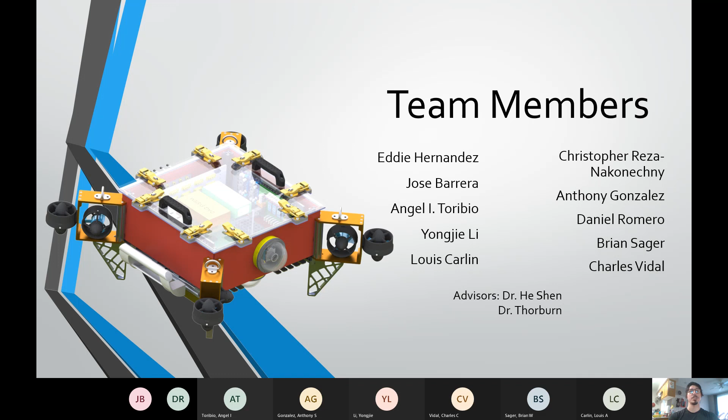I will start us off with the background. The RoboSub competition is held yearly by the nonprofit organization RoboNation and its affiliate sponsors. It is intended to foster the spirit of positive competition and community in STEM, specifically in robots, across a range of age groups and backgrounds. It tasks participants with building an autonomous underwater vehicle, or AUV, which navigates the underwater arena and completes tasks. The image on the right is an aerial view of the arena, the Naval Information Warfare Center Pacific, located in San Diego. During a normal competition year, the AUV will earn points by completing tasks.

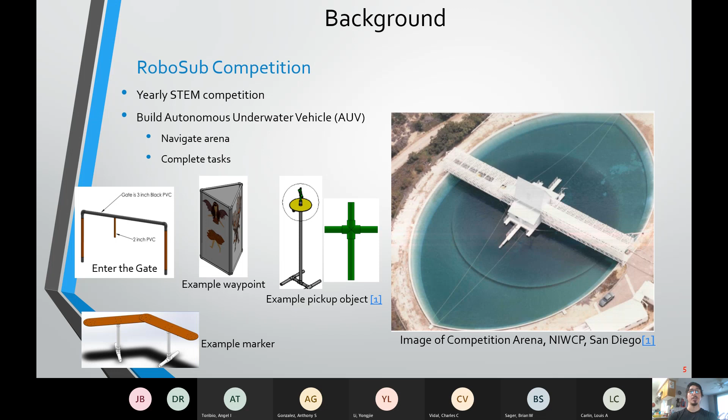The smaller images below show examples from last year's competition where the theme was vampires. This, however, is not a normal competition year. Due to the COVID-19 pandemic, the format of the competition has changed, which is why you're watching this pre-recorded presentation. But the AUVs will still be designed with the intent to complete the tasks as if there was a physical competition being held. Scoring will be judged not on AUV performance, but based on a presentation, a report, and a website.

Entering into the RoboSub competition this year is Lanturn. Our engineering senior design team has inherited this design from last year's members. Included in our inheritance is the SolidWorks 3D model, rendered images of which are pictured on the right. The top two images are the frame and the hull respectively. The bottom image is a rendering of the two components connected, including the internal components.

The project this year, considering the inherited model, consists of three main design steps. But before we even begin, our team first had the task of getting up to speed with what has been done. We distributed the files, analyzed the design intent of the hull, frame, actuated parts, and electrical components. Then we could take the first step and ask the question of each of these components: do they satisfy the requirements?

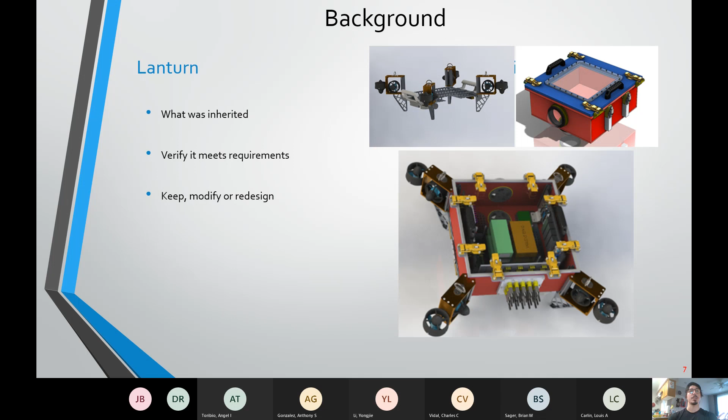The second design step depends on the answer to the previous question. If the contemporary design did seem to satisfy the requirements, then we move forward and verify the results of analysis that was done and complete any necessary analysis that was not. These could include stress analyses, heat transfer analysis, whatever analysis is required to provide confidence in the performance of the component prior to building and testing.

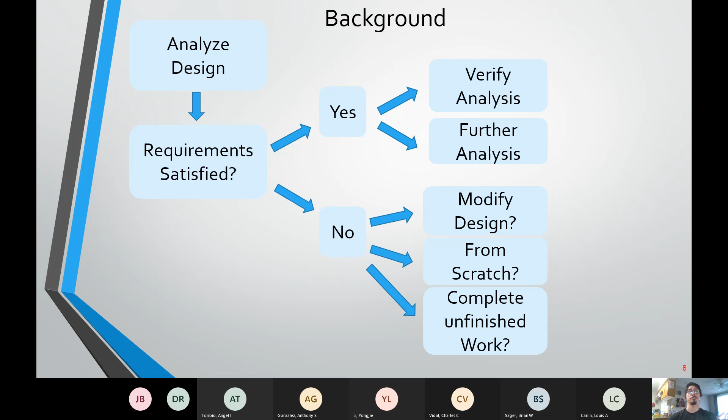If the contemporary design did not seem to satisfy the requirements, then we move forward and ask the questions: should we modify the design? Should we redesign from scratch? If the design was not finished, should we finish it? Taking into account the scope of the project, in that it is a multi-year, multi-team project, the third step is considering passing the baton, making sure the next year's team is able to get up to speed quickly and as comprehensively as possible, without our team being present to explain anything.

This is actually worked on concurrently with the first two steps, and it includes documenting progress, guides explaining how systems worked, and why they were designed the way they were. It also includes documenting problems we encountered or mistakes we made during our tenure so that they would not lose time to similar issues. This step also includes explanations of that which is left to be done.

As we present our project, the components will be explained from these three perspectives: what have we inherited? Why would we need to change it? Or how did we verify it needs not be changed? And future work: what problems are we leaving for the next generation to solve?

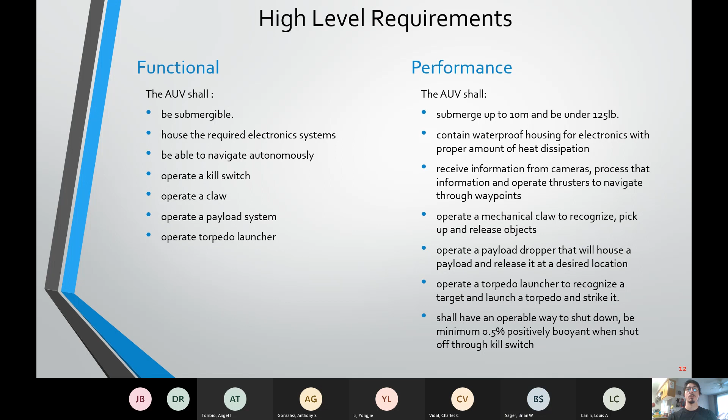Next, we move on to the system overview.

The 2021 team has inherited designs for frame and hull from the previous year's engineering senior design team. This includes the SolidWorks 3D model. The images on the right are renderings of the inherited model, with only the side handles added this year.

The hull and frame are designed to be fully built as separate entities and connected with latches. The hull is cuboidal, matching the shape of the internal electrical components. This includes the electronic shelving, which is removable and folds open for ease of access.

The frame is made of 6061 aluminum with a design allowing for modular attachment of T-slotted parts. More on this in a moment.

The 8 thrusters are arranged for ease of directional and translational control. 4 thrusters are oriented vertically, 4 in the horizontal plane at 45-degree angles. The bottom image of Lanturn is a top-down image where forward is indicated by the positive X direction.

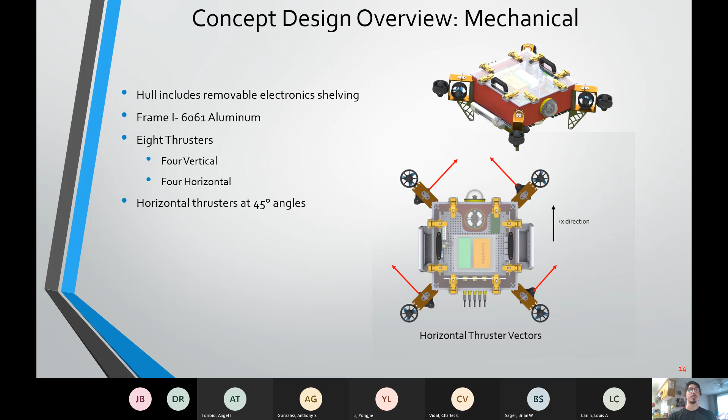The black arrow on the right. The 45-degree angles make forward, strafe, and yaw commands all equally simple. More on this in a moment.

The T-slotted connection capability of the frame design allows for ease of access and maintenance of all connected parts, and for quick modification for testing or design alterations. The parts to be attached will first connect to the connection hardware by 4 screws, shown yellow in the top right picture, and the hardware will be attached to the frame by 2 set screws.

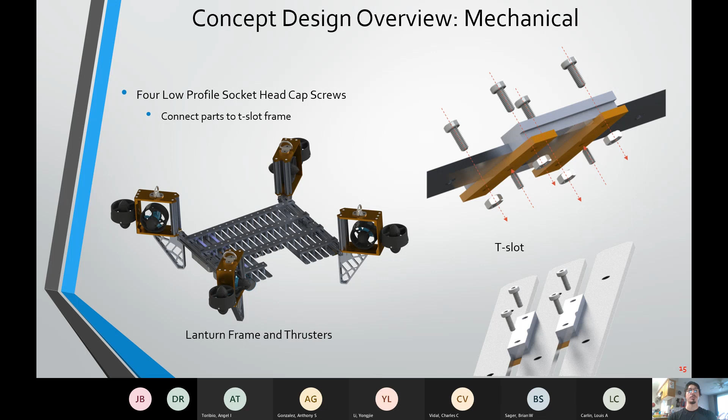The functional requirement for our sub is to maintain a minimum of 0.5% positive buoyancy when the AUV is shut down using the kill switch. The properties of Lanturn were found using mass property functions on SolidWorks, which we used on the 3D model.

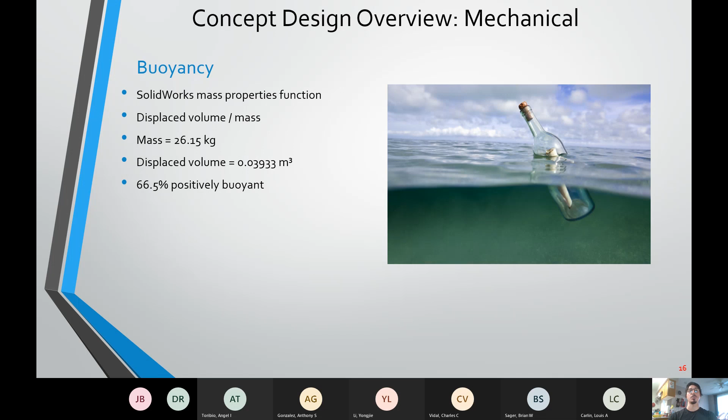This high buoyancy presents a problem, but it will be future work for next year's team to address. Because of this, buoyancy effects are not analyzed when changes to the design have been made this year.

In order to complete tasks, the sub has actuated systems, including a torpedo, dropper, and grabber. The AUV will receive data from sensors for making decisions, including hydrophones, 2 cameras, an inertial measurement unit (IMU), and a Doppler velocity log (DVL).

Our team will not be discussing the sensors since the computer science portion of our team is taking point on them, and they have a separate presentation.

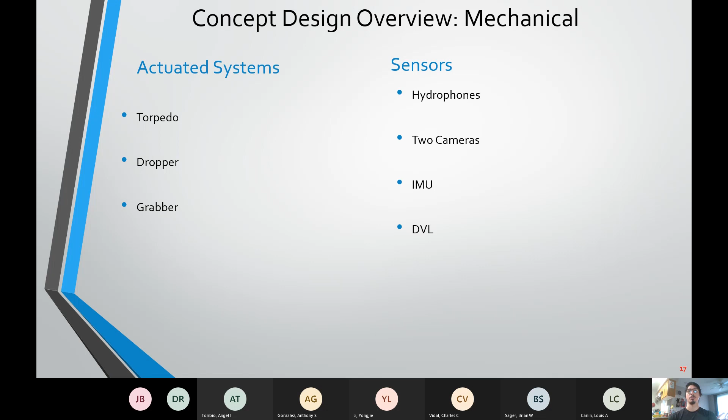Next, we'll move on to the mechanical.

Hello, my name is Angel, and I will be talking about the actuated systems, specifically the dropper, which is one of the 3 actuated systems used for the competition.

The dropper system had requirements to be met, which consist of the markers fitting within a box of the following dimensions: 5.1 by 5.1 by 15.2 centimeters.

A CAD of the system was made with three major components: the housing, the rotating compartment, and the shaft that connects to the motor. The dropper system will attach to the shaft of a servo motor to rotate and release the markers. It will have to be 3D printed.

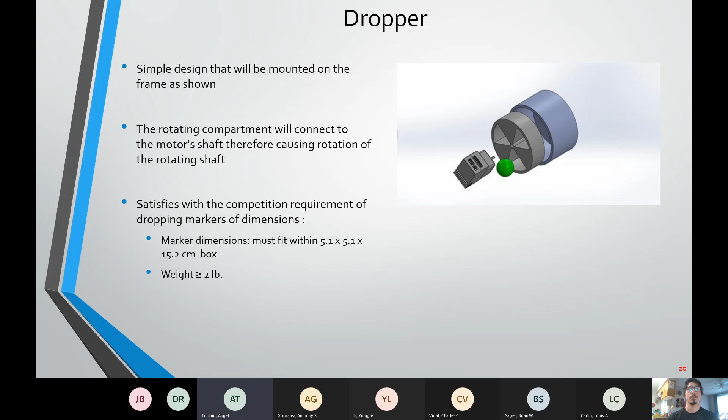When it came to the grabber, last year's team left us with two placeholder designs. Both designs had no mobility capability or any testing done. The first design was created by the team but seemed to have been a step file, so the parts were unable to move. The second design was a grabber sold by Blue Robotics. Although due to this design no longer being sold, and with no info or timeline for when the revised design will come out, our team had no choice but to build a grabber design from scratch.

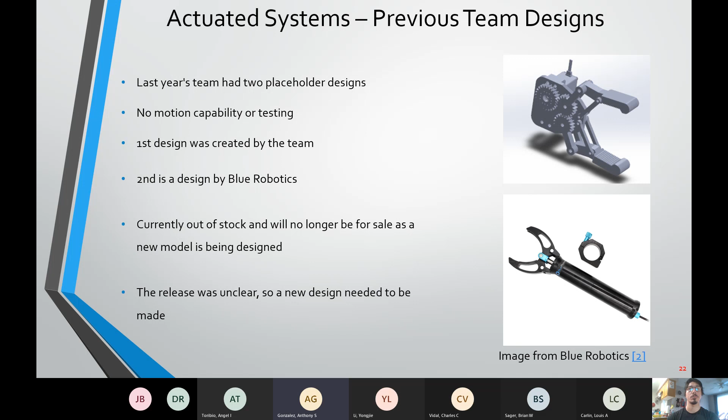When researching grabber designs of previous winning teams as references, focus was placed on their placement on the grabber in relation to our own, and how well the team performed in the grabber challenges of the competition. With this in mind, the design on the right was made.

The grabber design uses a combination of 3D printed parts and aluminum materials. The white components of the model represent 3D parts, while the gray components are aluminum. The arm is made with two parallel aluminum sheets, which are connected by aluminum linkages and tightened with hex nuts. A servo horn will be connected to the gears of the claw to have a larger surface area to better distribute the pressure created when moving the claw and/or arm. Furthermore, the servo horn functions as a way to connect the arm and claw to the motor at multiple points for better support and motion.

The design will be equipped with two HS-646WP servo motors due to the motor being IP67 rated and routinely used by many teams.

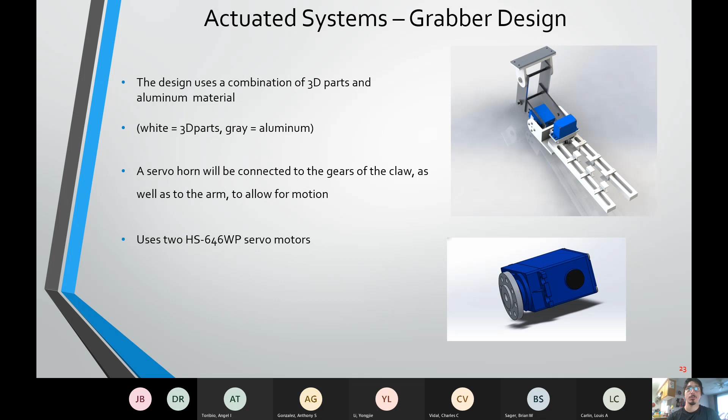The grabber will be mounted at the bottom of the sub using the T-slot frame last year's team designed for mounting the actuator systems and other components. The placement of the grabber remained unchanged from last year's, as the claw needs to be in view of the camera for the sub to make real-time adjustments during the competition. The mounting system will be connected to the sub using set screws like the other components.

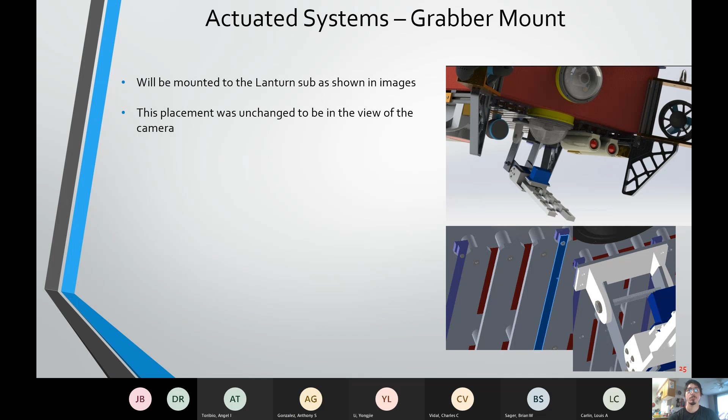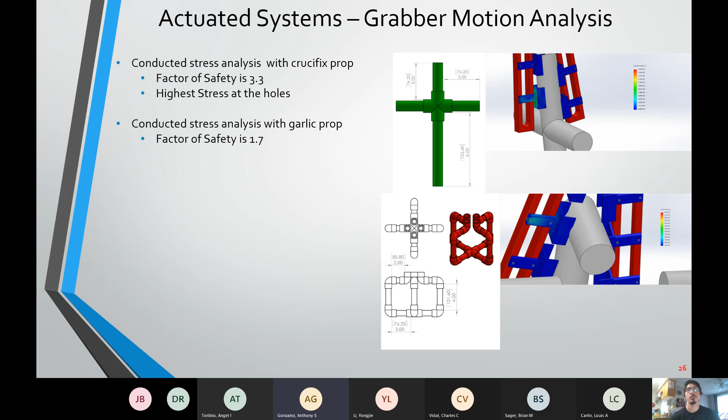Stress tests were performed on the claw to determine how the motion will impact the durability of the claw when performing the task of grabbing objects. Using the objects of 2019's competition as they were the most recent models, as 2020 and 2021 were virtual. The first object was a crucifix prop, which had a factor of safety of 3.3, whereas the second object was a garlic prop with a factor of safety of 1.7. In both cases, the point of highest stress was located at the holes where the blue mini grippers connect to the claw. When designing the claw, we had these objects in mind, as historically the objects in this challenge are cylindrical objects and have a diameter of approximately 1 inch.

For the waterproofing of the servo motors, we decided to go away from designing and building a bulky waterproof enclosure and looking at less intrusive methods. This led to the use of applying mineral oil to the inside and outside of the motor and sealing the seams with epoxy, as the image shows the servo being coated in mineral oil.

This solution allowed our test servo to run for an hour under shallow water. Additionally, this method was tested by a separate team with their servo motor being submerged in seawater between 14.8 feet to 22 feet in depth, which is approximately 4.5 to 6.7 meters. The servo used by this team was a cheap 9-gram servo and functioned well under these conditions. Using our testing and separate testings, we are confident that our servos will have no issues operating for the 15 minutes and the max depth of 5 meters for the competition using this method.

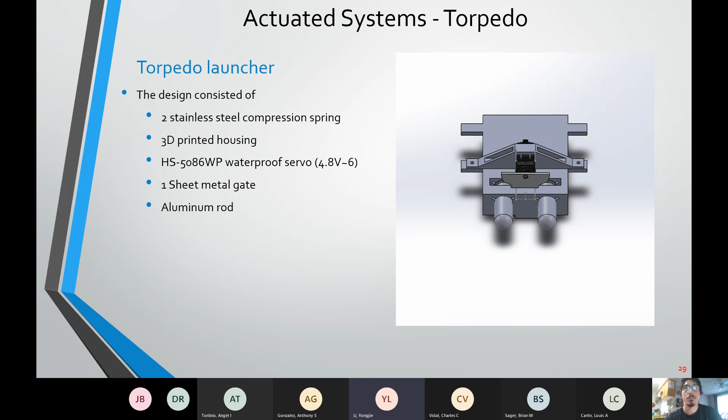The placement of the torpedo launcher: it will be mounted with screw and bolt, and the placement will be the same as where last year's was meant to be placed. It's supposed to be on the bottom right side next to the camera, so it has a clear view of our target, and being close to the camera makes it easier to calculate the offset.

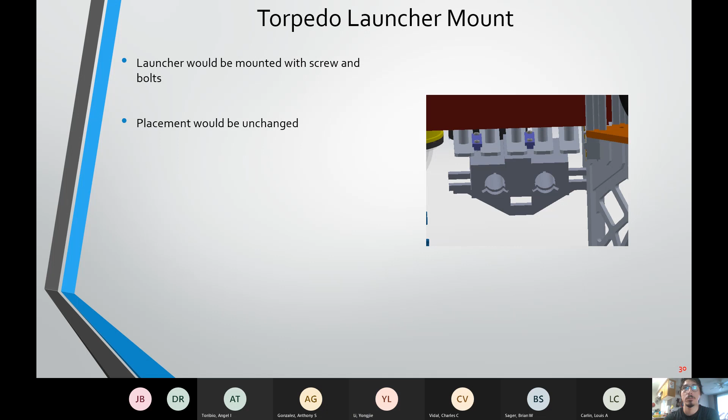The torpedo design has field requirements from the competition. First is the size, which is supposed to be the same as the dropper, with a size limit of 5.1 by 5.1 centimeters and 15 centimeters long. The weight should be no more than 2 pounds, and it should be marked with the team's logo.

And this, next slide.

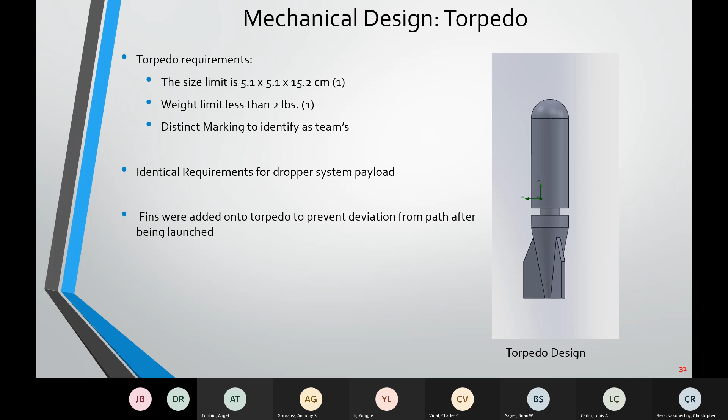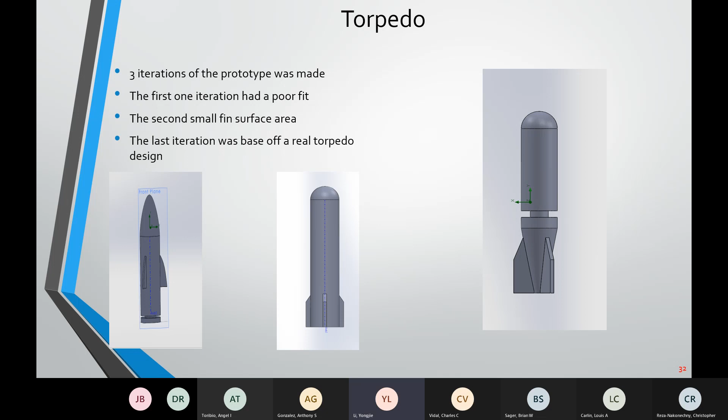The torpedo design this year had 3 different iterations. The first was from Team Arctos, a prototype I got inspired from, but it turned out it didn't fit our design because our gate is more in the front compared to theirs, so I couldn't use their design. The second design was a new one I designed, but it had poor fitting and didn't fit well, and it also had a small fin area. The last version is based off of a real torpedo and has the max fin area compared to all the other designs.

Here I did a fluid simulation based on the torpedo for my final iteration. The goal was to get the drag coefficient to 0.2, but I ended up getting a drag coefficient of 0.33.

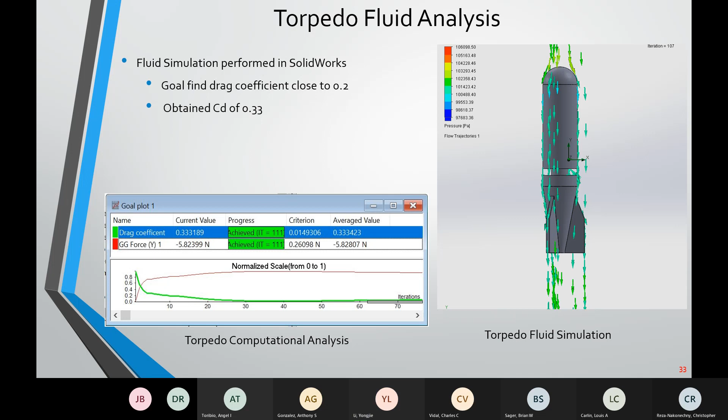So I could use it to find the trajectory in the water. For this equation, we need the input of the force of the launcher from the spring, along with the dimension, weight, and camera location to input into the drag coefficient equation to find the trajectory. Here you can see it on the right side.

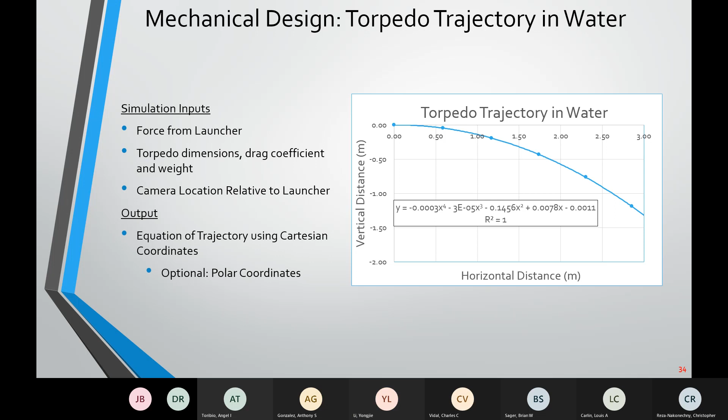Hello, I'm Charles, and I was looking after the hull. The hull is comprised of 5, 1/8-inch thick aluminum sheets that are welded to an aluminum sheet on top. This was designed by last year's team for accessibility of electronics, which explains the box shape of it.

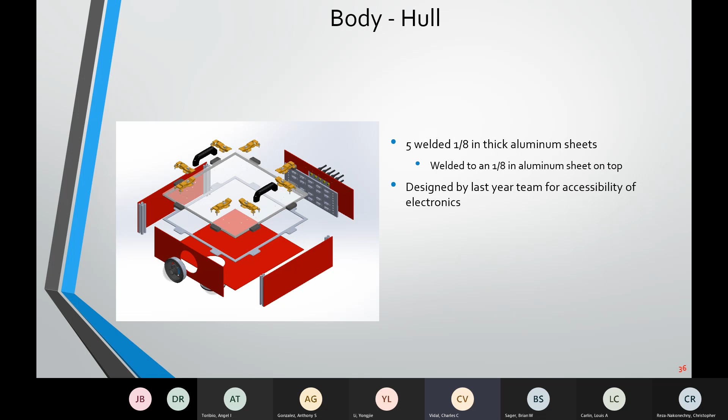Stress analysis was performed using the max depth of 16 feet, or 5 meters, which leads to a pressure of 48,000 pascals. A factor of safety of 1.1 was found, which definitely needed improvement since the hull cannot fail. The max stress was found at the corners on the top sheet, so all adjustments were made with this in mind.

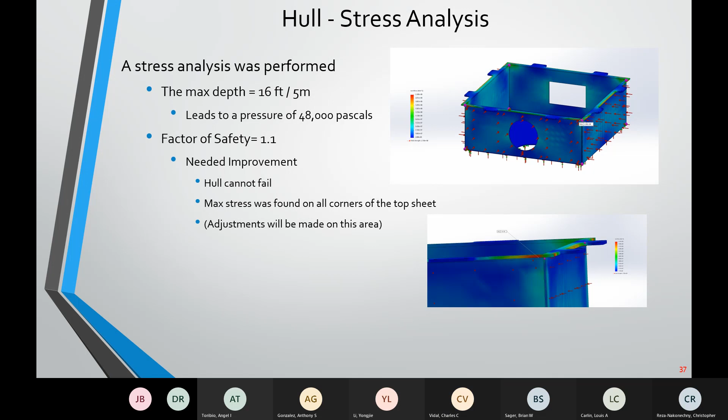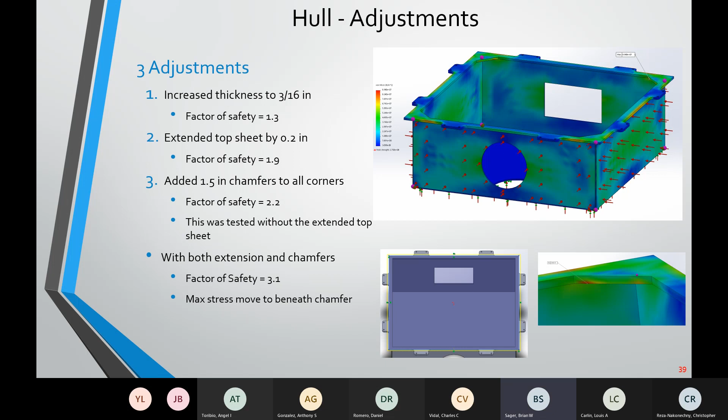This analysis of effectiveness I was not able to perform and it still needs to be done. The alternate method I explored was designing a cover that inserts into the cavity of the hull and making a seal inside the perimeter, but this will require a pressure release inside the hull to equate for the displaced air. Think of it like a food container or pantry storage container, with the inner wall acting as the seal.

Another idea was to create a grooved perimeter with a fitted track for an O-ring as the seal. But the reliability and replaceability concerns of the O-ring have been a major concern for that method.

Lastly, an example found on the RoboSub RoboNation website was a sub that used a screwing mechanism as a clamp to attach the cover over a gasket. With this technique, we will need to find a torque value to determine the needed force to create the seal. This idea is predicted to have longer durability than clamps, as screws don't deteriorate and there's no bending of metal or tension involved, as there is with clamps.

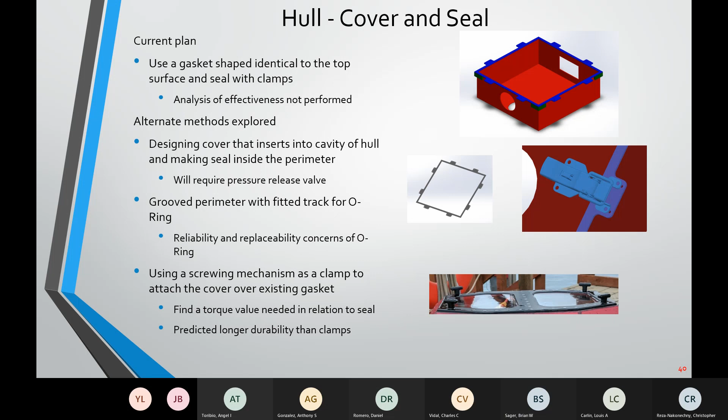Also involved was trying to finalize how the electrical housing is going to fit and interface with the body of the hull. Currently, the plan is to attach a rail in each corner with a track to slide the separate electrical board in and out of for use and replacement as needed, and arrange a permanent plug interface in the rear of the hull connecting the subsystems affixed to the AUV to that.

An alternate method that was explored was drilling additional holes in the floor of the hull to create additional tracks for mounting additional electrical hardware. What was discovered is the possibility of using those holes in conjunction to mount the frame onto the hull, also allowing a more modular installation of electrical boards instead of having a single giant board. However, more places to seal could affect the stress analysis and factor of safety in the future. It needs to be analyzed.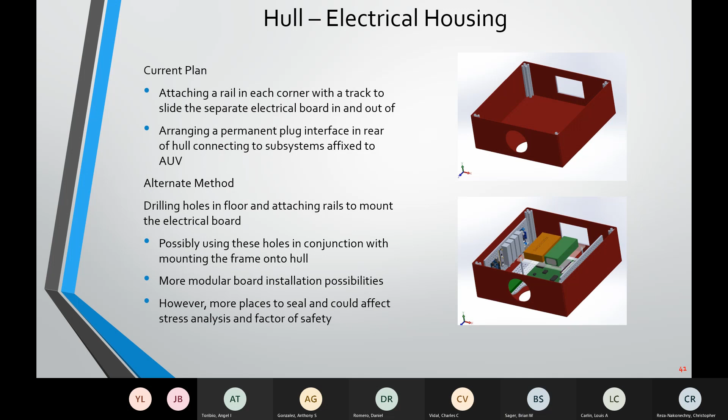So currently, I was in charge of trying to produce the hull, and with the materials that we were given last year, or that last year had acquired, based on our new stress analysis that was performed, we don't think that these materials were sufficient.

So what still needs to be done is finalize the sealing method of the hull with the cover, finalize the electrical board interface, obtain new materials, and then find a welding shop or process to ensure waterproofing for the full build. This is probably not a student task, so you will have to find a shop that will do that for you.

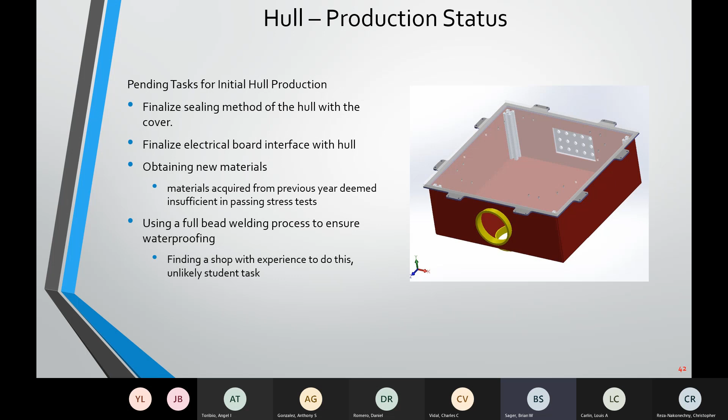The second main mechanical design of Lanturn is the frame, and I will be talking about that. Angel.

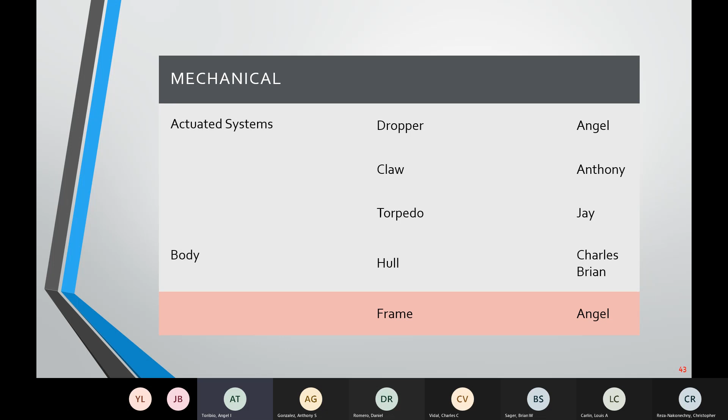The frame was designed to consist of multiple slots to facilitate the mounting of numerous components, such as the actuated systems, handles, mounting points to join the hull and frame, and more. The main body of the frame will hold the weight of the hull at its top, the 8 thrusters and their housings on its 4 corners, and other systems or brackets on the side T-slots and its undercarriage.

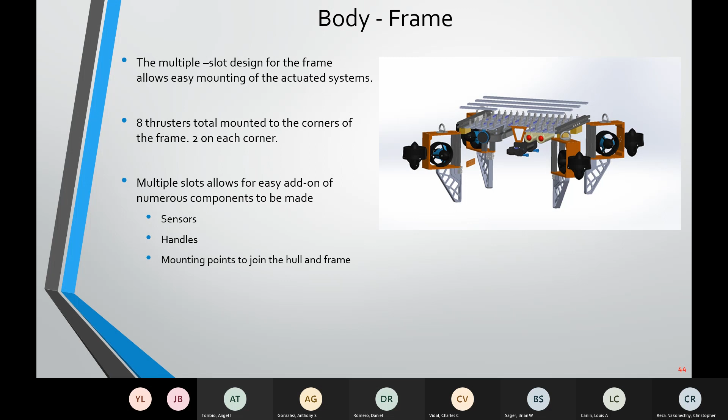The design of the legs on the frame was optimized to carry the weight of the sub from last year's design. The material of the legs was chosen to be 6061 aluminum, and the design would reduce the weight of the leg by 1.64 pounds. However, the design is too complex to manufacture, and the material cost was found to be unnecessary. Moreover, the weight is of no concern since the buoyancy of Lanturn is a problem yet to be resolved.

For that reason, the CAD rendering, as you may see, was changed to a much simpler design.

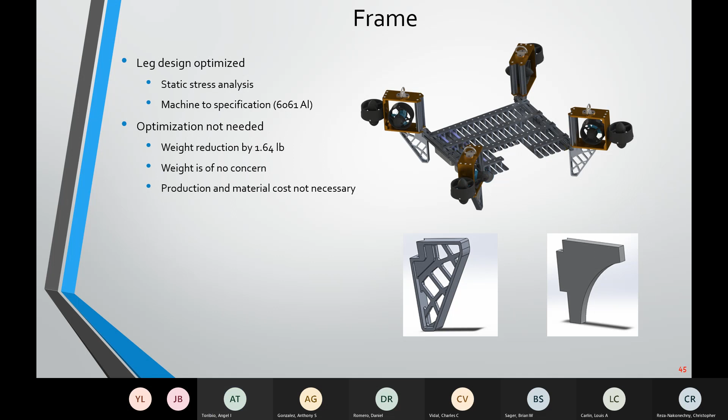The main frame body can be divided into 2 sections, the undercarriage and the top section. The top section is composed of aluminum bars of 1/4 inch thickness, while the undercarriage consists of slots that are 1/8 inch thick. The top section has a greater thickness since the weight of the hull will lie on it. The material for the bars and slots were purchased and cut to the dimensions needed, as shown in the bottom right picture. To complete the assembly, standoffs and screws are needed for purchase.

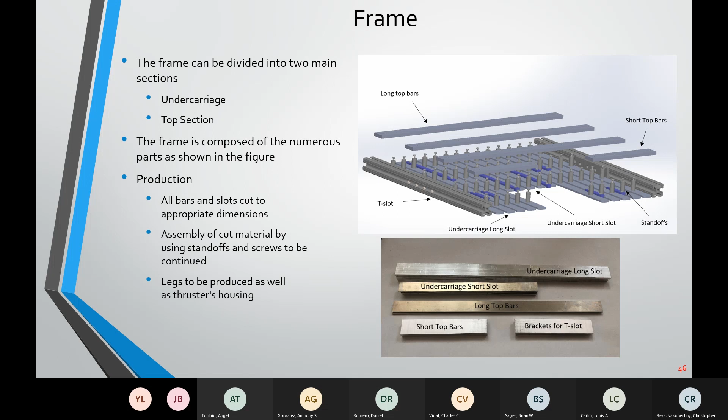A few changes were made or added to the CAD of the frame. The previous design had 2 slots joined together by brackets for simplicity of CAD assembly. This was replaced with a single T-slot of the same full length. This allowed for new handle mounting points at the center of the T-slot, and the handles replaced the handles that were on the hull for greater stability, which can be seen in the pictures on the right and the handles in the picture below.

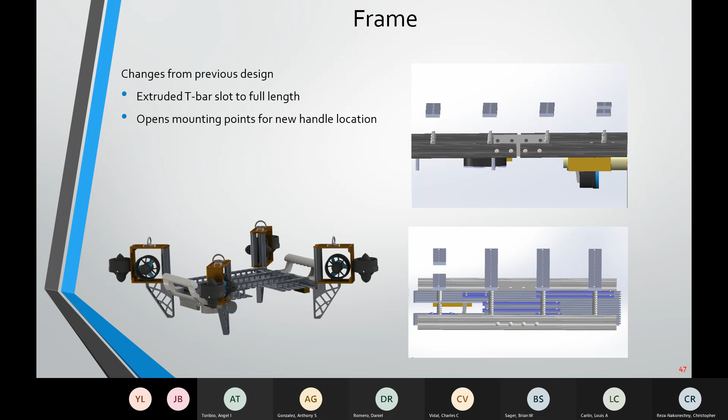Previously, the T-slots on the sides of the frame had no mounts to the slots and bars of the frame, meaning there was no way for the T-slots to join to the frame. To solve this, a bracket will be welded to the undercarriage slot and top bars, and a set of screws will join the bracket to the T-slot.

The design of the previous year's team on how to mount the frame and hull was also kept. This design includes welding a bracket to the hull and T-slot and joining both through a latch, as you can see.

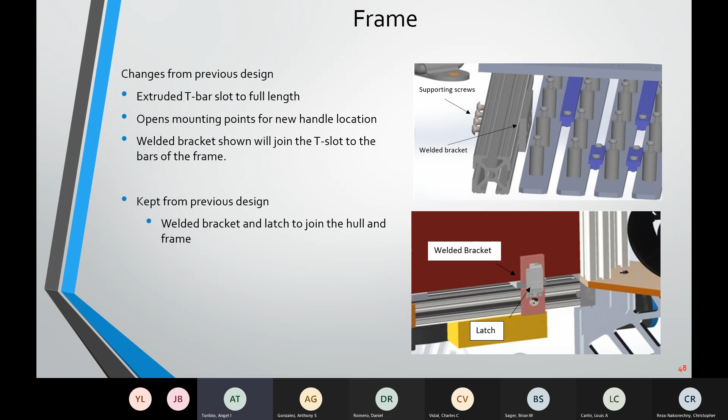Now to begin with the electrical portion, mainly the power distribution board. This section was worked on by Daniel Romero and myself, Jose Barrera. A bit about the reason for having a power distribution board is that prior to these designs, buck converters were meant to be used.

A buck converter is used to drop the voltage to any required amount. If this was still the case, there would be a need for 3 total buck converters, one for each of the required voltages, those being 5 volt, 7 volt, and 9 volts, from the initial 14.8 volt battery. The buck converters aren't small individually, so they'll take up a lot of space.

Last year's team also worked on a design for the power distribution board to not use multiple buck converters. This year we tried to improve on that design by going over their work and seeing what we could change.

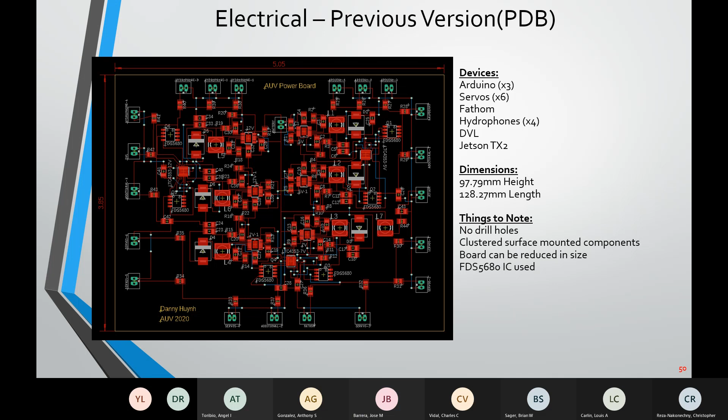My name is Daniel, and I'll be going over the device operation requirements. The power distribution board is crucial to the operation of the RoboSub, where its purpose is to transfer or distribute the power supply to the various components.

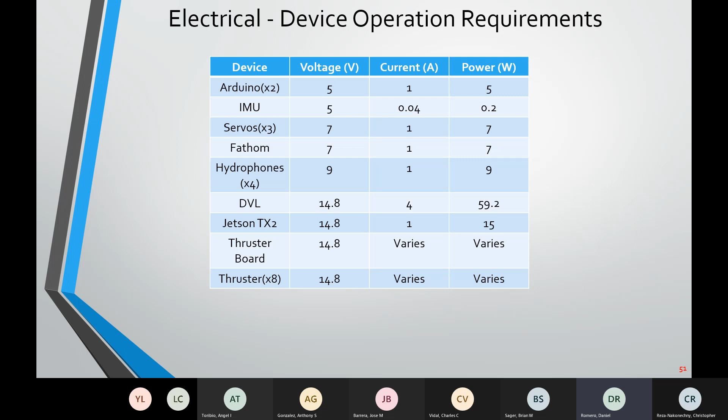Next slide. I will now go over the simulations performed prior to designing the circuit board.

To power the different components, an integrated chip called LT3976 was used as a buck converter. The function of the LT3976 IC is to step down the input voltage to the different required values. The chip was selected to help minimize space on the board, and it is ideal for low current circuit designs, with a max output current of 5 amps and an input voltage range of 4.3 volts to 40 volts.

Meeting the device operation requirements, using LT Spice, the circuit was designed to conduct simulations. Changing the load resistance outputted the correct values needed.

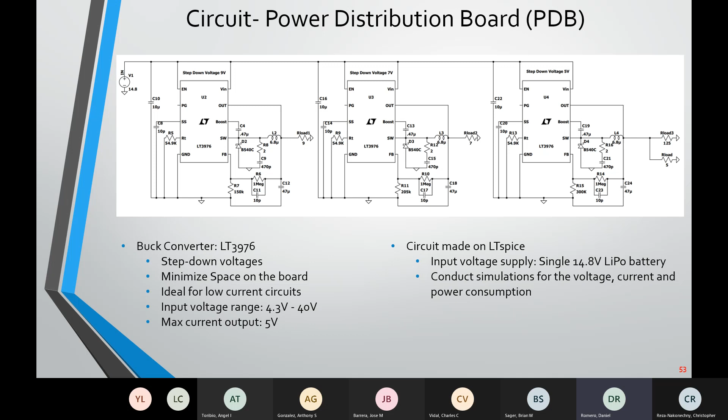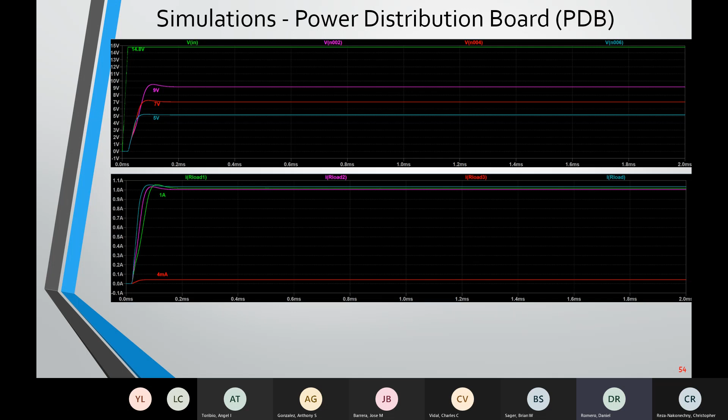Not only was transient analysis conducted, but efficiency reports were also gathered on LT Spice. These efficiency reports show how well the integrated chip performs the voltage regulation, resulting in the proper output values. These values align with the efficiency range on the datasheet of the LT3976, giving us more confidence in the chip's performance moving forward.

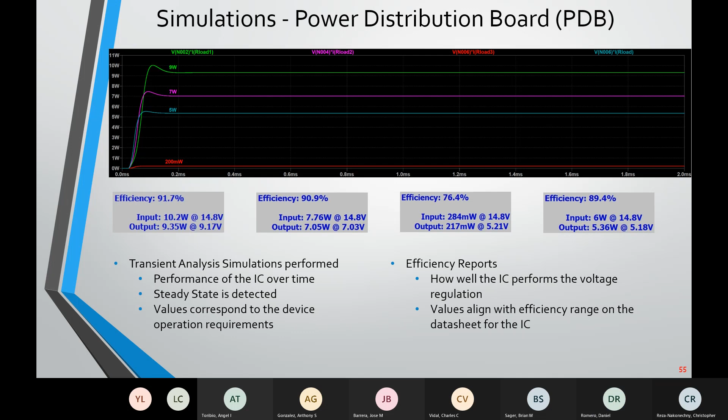I'll now talk about the 2021 power distribution board that we've created. In this design, we planned on improving the overall look, which is why it doesn't resemble the previous team's board.

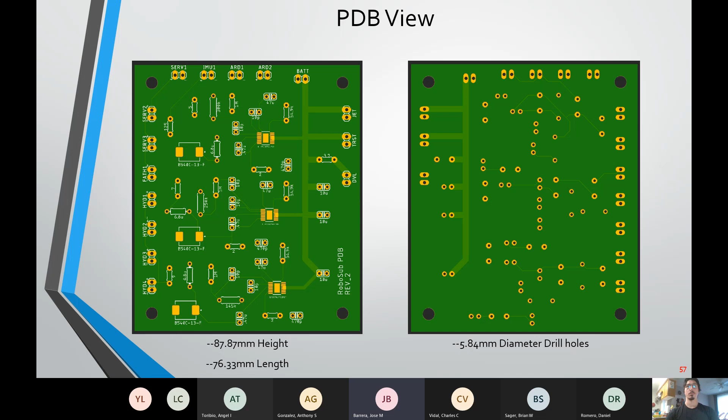The battery, as seen from one of the top headers above, has larger trace length and width of 2 millimeters each, on the bottom and top side. That is to prevent them from burning out from the battery's input current that will be passing through.

The headers were placed around the board, evenly spaced, in order to not interfere with any of the other components when they are in the sub.

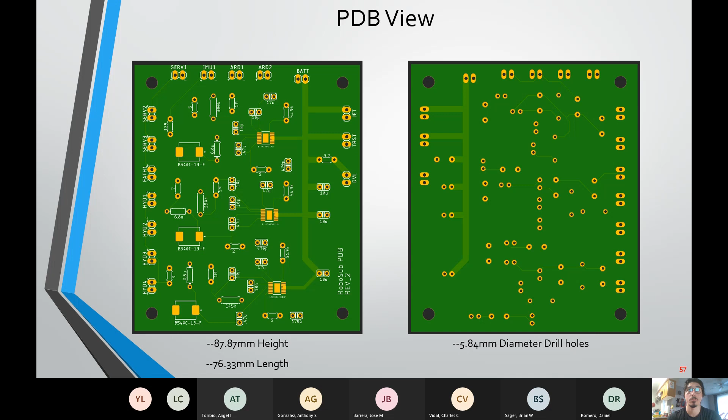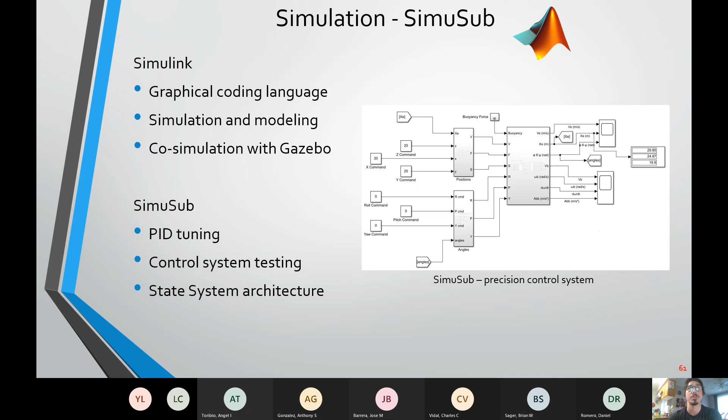Simulink has tools for state system architecture as well, which the mission planning team uses to navigate and complete tasks. In short, it should work well in collaboration with the work of the computer sciences, mission planning, navigation, and control system teams. The work that had been done so far is to create a model with dimensions, mass, and inertial properties, as well as thruster location.

This data was found using the mass property tools in SOLIDWORKS 3D model. Also completed is an algorithm which combines the PID outputs into force and moments on the model. There are two control systems which have been designed as well.

The first control system is named the traveling system. Because of its design, it should handle long distance translation and path following well.

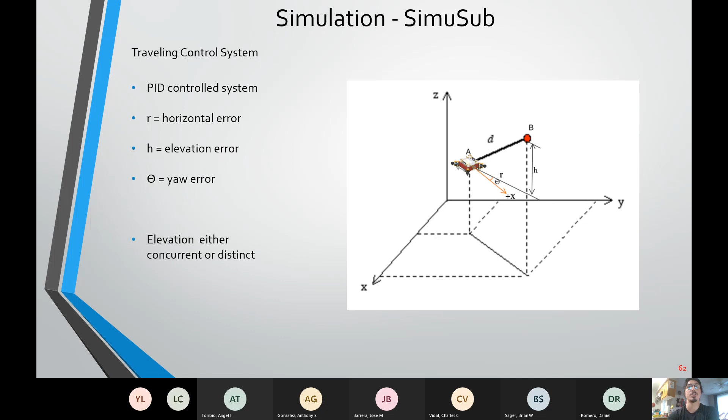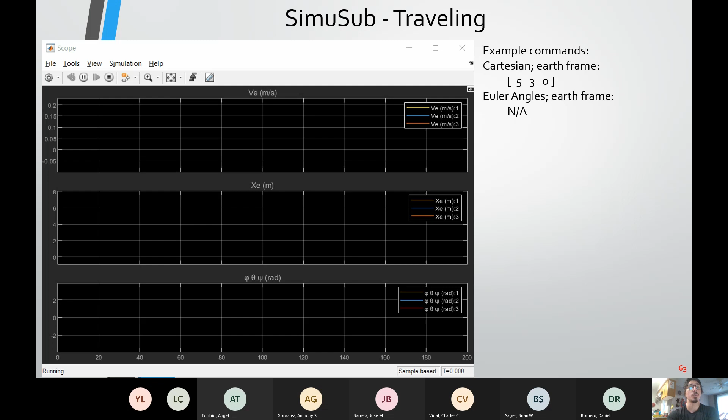Notice that the velocities are jumping between positive and negative. This means that the sub is overshooting its command and reversing, which is typical of PID controllers that have not been properly tuned. That can also be seen in the position graph in the middle. It can be seen here that the sub is bouncing around the command location. There's still much work to be done in this control system to get it fully functioning, which is work for the next year's team. Let's move on to the next control system.

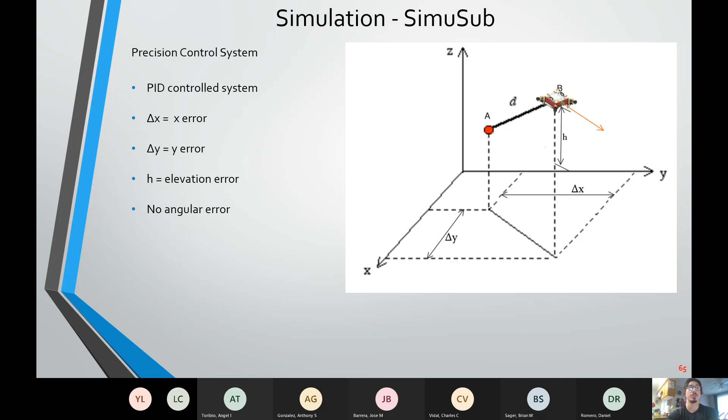For tasks that require more precision, mission planning should switch to our next control system. The system does not yaw, but rather strafes to the command location, as seen here. Notice that the forward-facing angle has not been changed. The PID uses X error, Y error, and elevation error. The idea is that the traveling system would get the sub close enough to the task until the precision system would take over and move the sub into place.

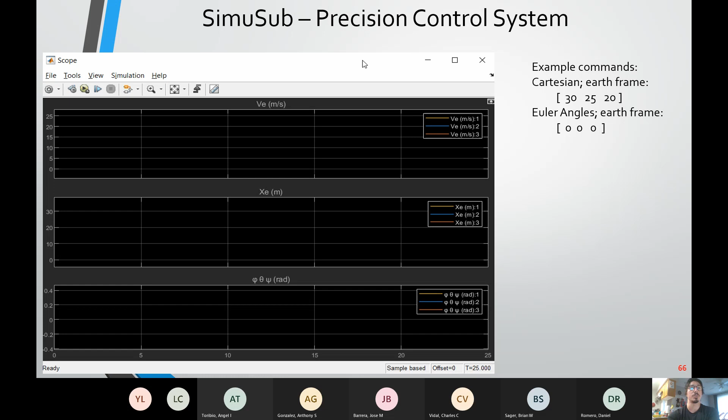Further testing needs to be done to determine if the system is robust enough for deployment or if any input or situations would cause issues.

For SimuSub to be fully functional, more work needs to be done than has been done yet. Next year's team will be provided guides and other reference material for them to understand the system well enough to continue the work.

But what they will inherit is a potentially powerful tool for testing, simulating, and tuning PIDs and collaboration with the computer science team.

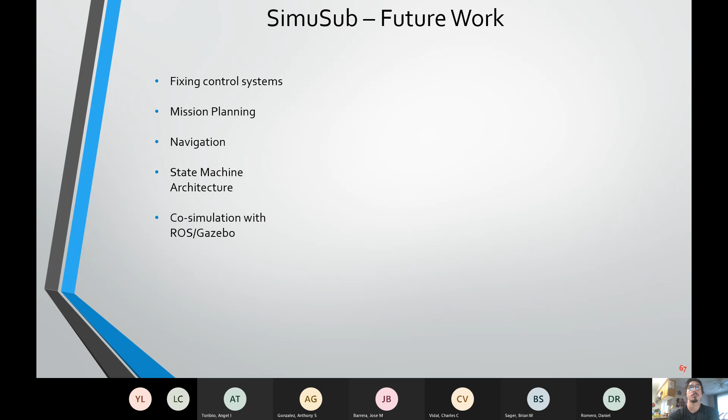All right, hi. My name is Eddie Hernandez. I'm an electrical engineer, and for this senior design project, I focus solely in Gazebo simulation, which I'll explain in the next slide.

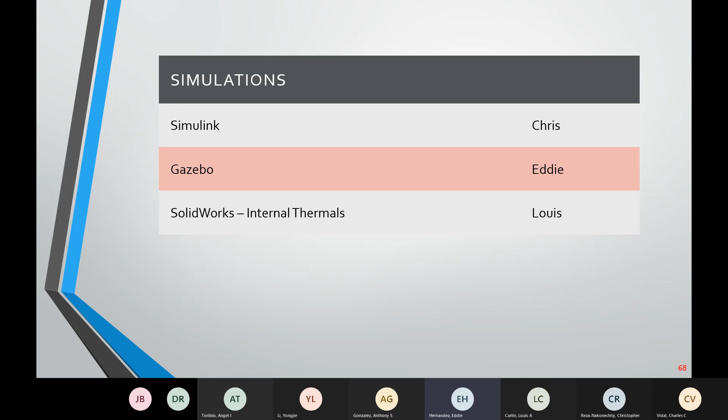So for this project, I really focus on the robot operating system because I found this to be very beneficial to our AUV team, simply because it has a variety of tools that allow for a flexible design, such as testing data, communication, perception, data logging. And for this particular semester, I focused on the simulation more.

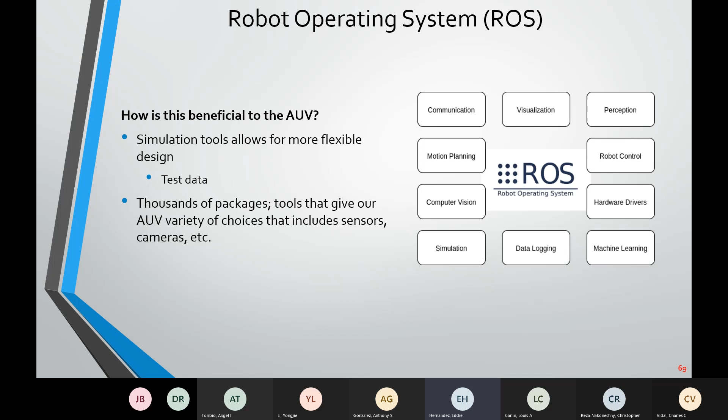And the great thing about ROS, it has thousands of packages and tools that give our AUV a variety of choices that can include sensors, cameras, IMUs, and so forth.

So as you can see, more particularly, I've been using Gazebo. That's a software that's contained within the robot operating system. This is something that can help our team see our version of our robot model in Gazebo and test out its programming and coding before releasing our final design, RoboSub, into the competition.

So if there's anything that needs fixing, say in the XYZ coordinates it's not going fast enough, or the sensors aren't detecting obstacles in front of it, we can always change its coding until we fix it, before implementing it into the RoboSub.

So this is one of the software that our senior design team didn't use, the Gazebo, but for this semester I decided how useful this might be, and I thought I'd bring it and use Gazebo for this senior design.

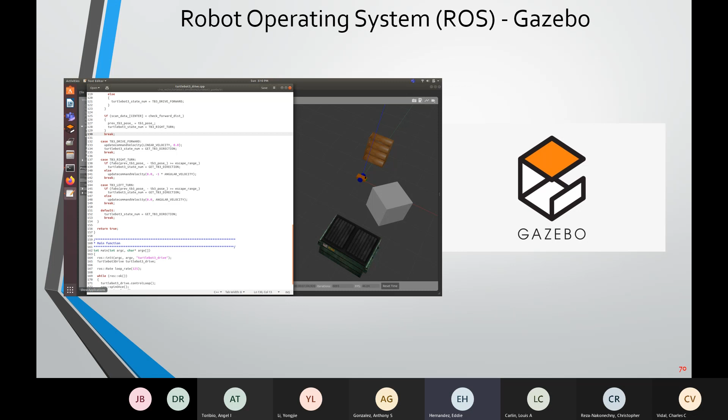So what I really wanted to do is replicate the arena to match its dimensions, like length, width, and height. Something I wanted to use in Gazebo is the water environment.

Something so that our team can test its simulation and see how it functions within the water, and add things like sensors and cameras, something that we'll also be applying in the design for the next senior design team.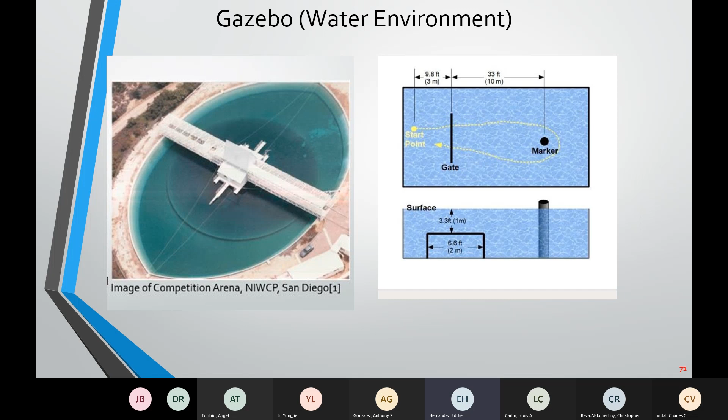It's just one of the variety of tools that Gazebo has. It can also match the sensors that we have in our electrical components. It doesn't have to be necessarily a laser scan. That can always be changed.

So, as you can see, this is a really good, useful tool because it tells us how far the simulation can go.

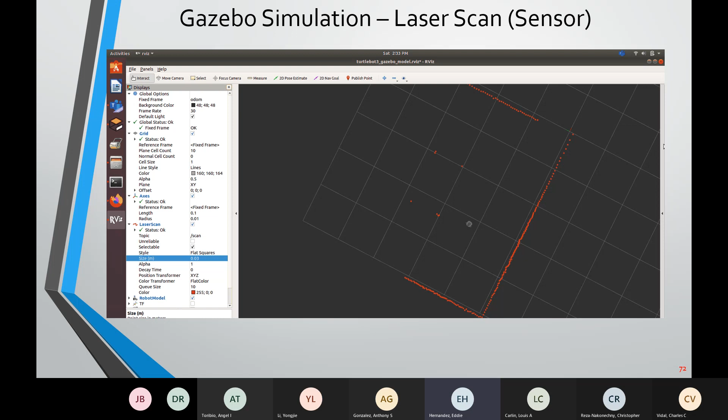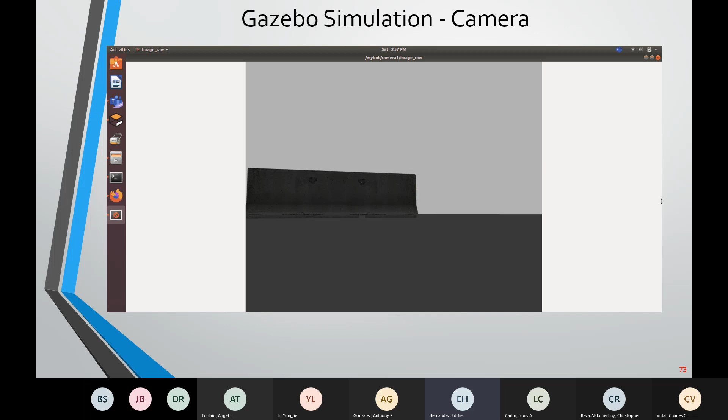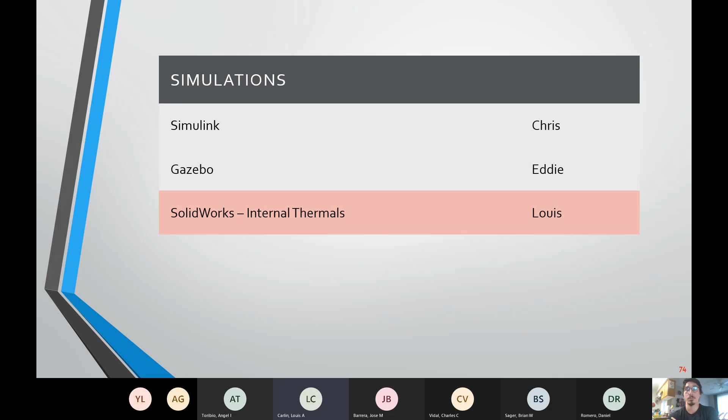Hello, my name is Carlin. I am a mechanical engineering student. I'm going to talk about the possible issue of the Lanturn AUV overheating. SolidWorks flow simulation helped greatly in exploring this issue.

Revisiting internal thermals: one of CSULA's previous AUVs, Eagle 2, would overheat and subsequently malfunction. So the question is, what about our current AUV Lanturn? A hand calculation followed by a flow simulation in SolidWorks was done to investigate this last semester. Assumptions were a water temperature of 20 degrees Celsius and a max battery operating temperature of 65 degrees. This is the most heat sensitive object inside Lanturn. From the expected electrical components that would be housed inside Lanturn, a worst case value of 100 watts of internal heat generation was found. Both hand calculation and simulation indicated there would be no overheating issue, but just barely.

However, there were some risks and limitations in this approach. One is the possibility of a future senior design team adding additional components to their RoboSub, such as more powerful processing components for improved computer vision. Also, this previous simulation was done only for finding the steady state condition, and the time to reach this condition was unknown. Lastly, the approach used previously used a very simplified model of RoboSub, and this limits accuracy to some extent.

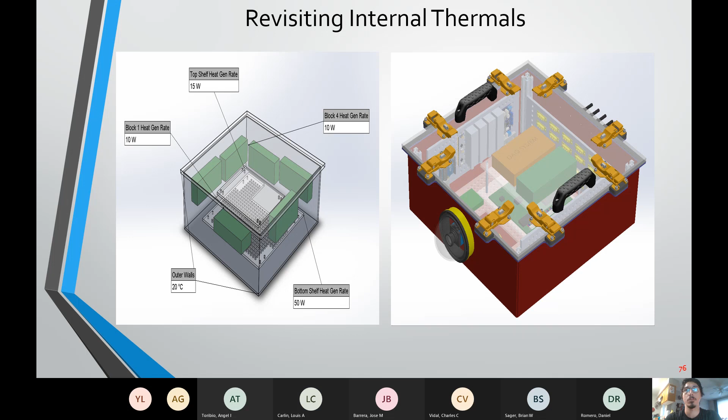To wrap this presentation up, a quick summary: on the mechanical side of this project, designing of our actuators has been completed, however manufacturing is incomplete and there's still testing to be done. On the electrical side, the power distribution board design and simulation has been completed, although manufacturing is still incomplete. On the simulation side of things, much more work is needed to be fully functional, and we are preparing to pass the baton to next year's senior design team. We will be providing them with onboarding material to help them get up to speed and be successful.